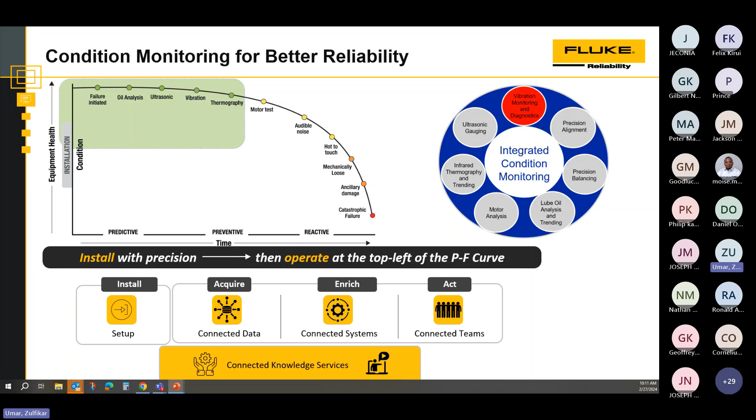Before we go into that, maybe just some ideas on exactly what we're talking about when we talk about vibration analysis and condition monitoring. Every equipment in your plant vibrates, and it is the aspect of this vibration that we want to look at. Sometimes vibration is good, but when changes start to happen and vibrations get more intense, that is when we should be looking out and have an idea of what we need to do. So the idea with vibration testing is to increase plant reliability and reduce maintenance costs. Those are the two key features we'd like to pull out from the slide.

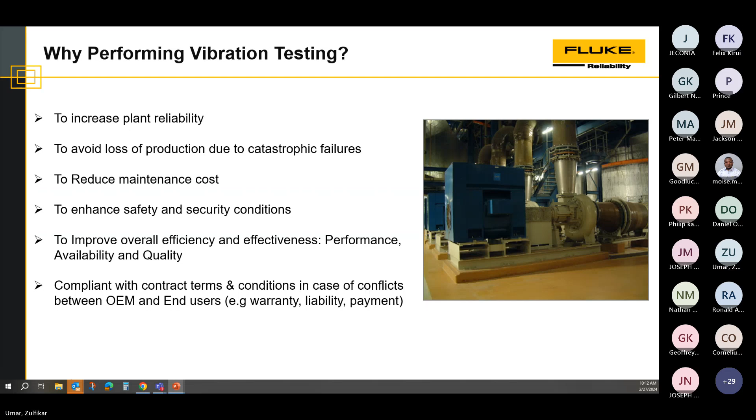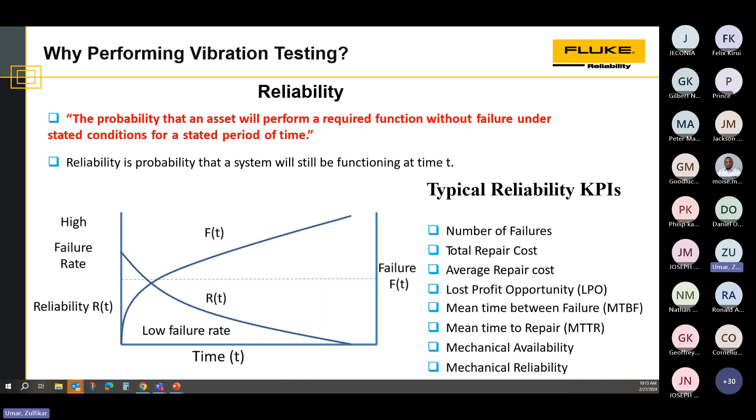So we spoke about reliability, and reliability in a nutshell is the probability that an asset will perform a required function without failure. This gives us the chance to keep equipment up and running, improve our productivity, and reduce our downtime. A typical reliability KPI, or key performance indicator, tries to determine how many failures we've had, what the total repair cost was, how long to failure, and how long the failure affected our productivity. These are the KPIs that we would want to manage, and the kind of KPIs you'd be able to work with in your CMMS system.

As discussed earlier, just to go to the basics, the first part of this presentation is really to solidify in your mind exactly what vibration is and why it's important.

In simple terms, vibration is a response to some form of excitation. Essentially, with a motor, you have a driving force, you have a speed. That speed causes a vibration on the equipment, and the condition of the equipment can be monitored and explained by the type of vibration that we are seeing.

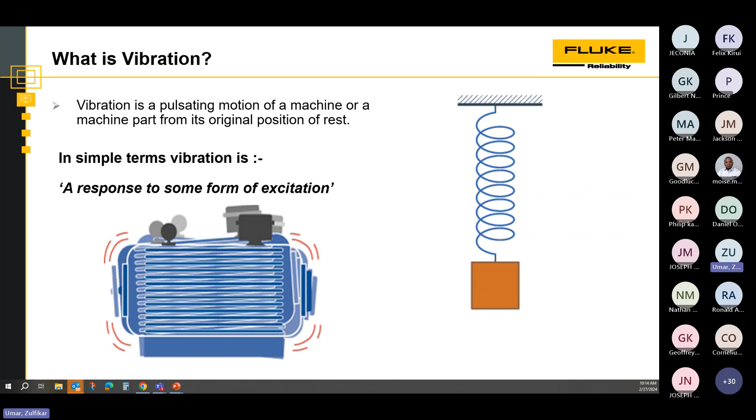So we measure vibration, or look at some characteristics of vibration: the amplitude, how high the vibrations are that we're seeing; the frequency, how often we see them; and the phase, how it relates to the other vibrations coming from the machine. Typically the phase relates to the driving force, and in most cases the driving force is the speed of the motor. So those are the three things we look at on a vibration spectrum: amplitude, how severe; frequency, how often it occurs; and how it relates to the driving force.

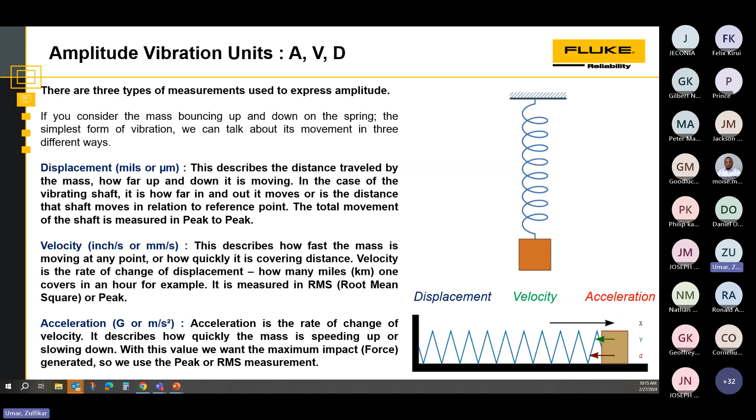When we measure vibration, we measure it in different ways. We have displacement, which describes the distance traveled by the mass, or the movement in mils or micrometers of the equipment; the velocity, the speed at which this displacement takes place; and the acceleration, which is the rate of change of this velocity. These are the three ways in which we measure the parameters for vibration, and we'll talk about this more as we go on.

If we look at what we can see, feel, or hear while looking at these vibrations, typically you would see displacement. If you're looking at a machine and can actually see the movement, that would be viewing displacement. Velocity is typically what you would feel in the sense of a vibration - you might not necessarily see the equipment moving, but you will feel that it's vibrating. And if you're looking at acceleration, this is something you typically would hear - you might not see it or feel it, but you will hear that there is change.

If you look at that in the frequency range, the lower frequency range is the physical movement - displacement. The low to mid frequency range is the velocity movement, or the feel. And when you start to hear things, you're looking at the high frequency range. When we talk about things like shock pulse, this is a specific technology we use for bearing detection. You will not see it, hear it, or feel it, but it is happening at very high frequencies that are out of the range of human perception.

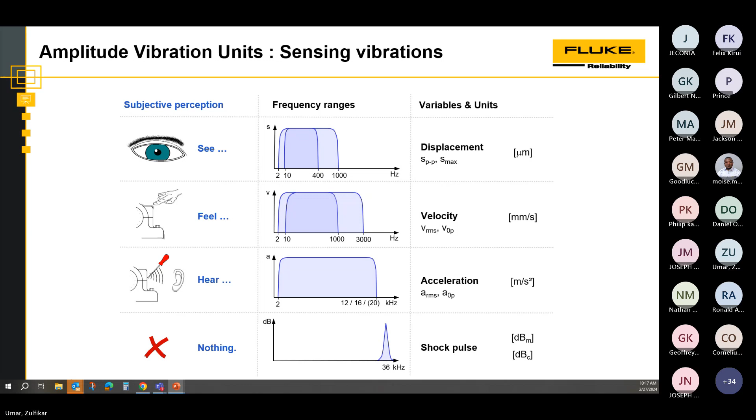So there's different levels in which we would like to look at the vibration. The overall measurement gives us an indication of what the overall vibration is for that machine, and we would just give it a figure. Let's say, for example, 10 millimeters per second. That doesn't tell us anything more than that the machine is vibrating at 10 millimeters per second.

If we now compare that against how it was vibrating prior, in previous history, and we see that the 10 millimeters is higher than, say, the 8 that was standard for the last week, then we now know that something is changing and that the vibrations are getting to a level where we need to start being concerned. So the overall measurements are usually trended over time, and that gives us an indication of machine health.

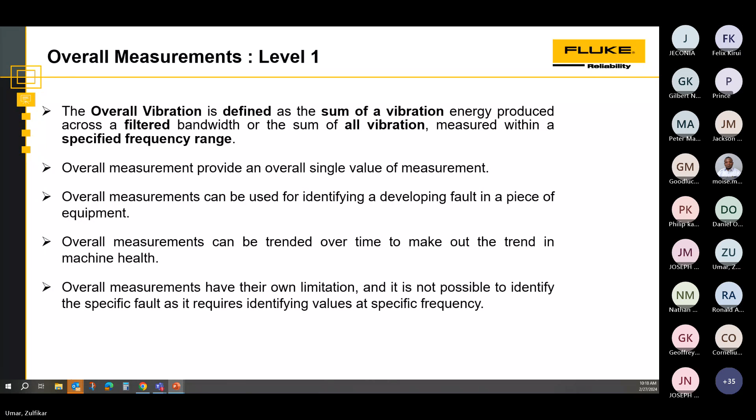Typically, you would have equipment that might touch or cross an alarm level and then settle for some time. That would be a first indication that something is happening, and that you need to start keeping a little bit more of an eye on this equipment.

Then as that particular problem progresses, you'll see that it will start to cross the alarm levels a lot more, and this is now when you need to start taking some kind of action.

If no action is taken, you'll find that it will reach a point where it has come very close to failure. You've now crossed the alarm levels, and the trend remains higher than it was before for a short period of time before it fails.

Once it fails, or once you've taken some action, you'll see that the trend will then settle to the levels it was at previously. So that's just some idea of how we measure vibration.

Vibration, as a standard, is normally measured as vibration root mean square, or RMS value. In some cases, we work with peak or peak-to-peak, or with an average. But across most of the standards we work with in industry today, velocity is measured in RMS, acceleration in peak or peak-to-peak, and enveloped acceleration in peak.

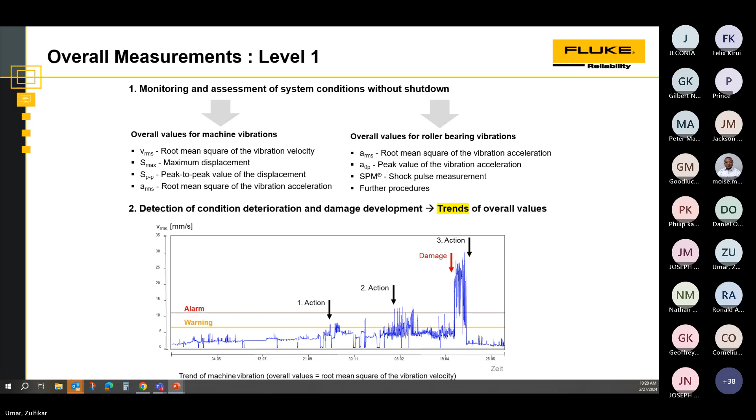So if we first looked at level 1, we're looking at just the overall vibrations. When we start looking at level 2, we want to know something more, so we want to look at spectrums now and start to determine what is causing the fault - where is the high vibration coming from.

In condition monitoring, your motor pump set would be considered your most basic or simplest machine set. That's purely because you have a shaft on the motor with a rotor and stator, 2 bearings, a fan, and then a coupling. Each of these components, at a specific speed, would give off a specific signature or frequency, and these frequencies would indicate where the fault is coming from.

Likewise, on the pump side, you have a shaft with an impeller. The impeller has, say, 6 or 7 blades, or 3 blades. The bearings on the shaft would be in 2 places, the drive end and the non-drive end. All of these would contribute to the vibrations that we're seeing.

And then, of course, you have the coupling, which would be the unit connecting the two. You would also find that the coupling itself has a number of bolts, and the number of bolts would also give off a frequency spectrum that would tell you when the coupling has an issue or not.

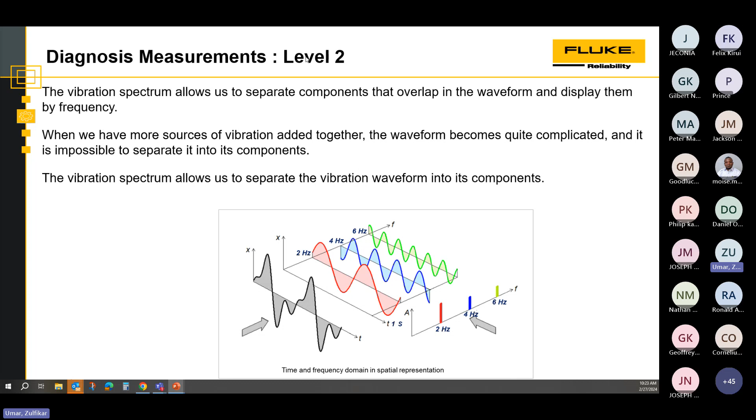It would then be a multiple of the running speed times the number of blades. And then you would see, maybe in green, the frequency coming from the bearing on that motor. So what we're trying to show here is that the time waveform, which is what you're seeing in gray, can be, through post-processing in the software, converted into an FFT - a fast Fourier transform - which allows us to look at specific frequencies with amplitudes, telling us exactly what problems we're seeing. This would be level 2 of the analysis, level 1 being the overall value, and level 2 now looking at specific frequency sets.

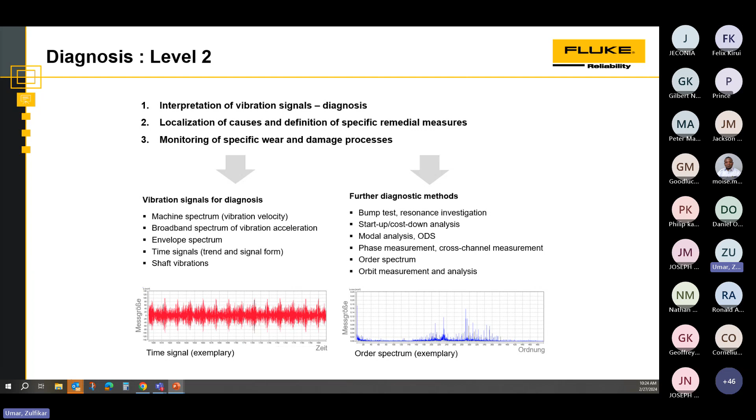This is the last slide I have in this section, just to give you an idea of how the levels of progression on the vibration strategy go. So overall values, overall monitoring, is level 1, which is your basic entry-level vibration data collection. Level 2 is where you start interpreting the vibration signals and looking at the frequencies.

In level 3, you start looking at how these are changing - what are the trends, how quickly, what is the speed of progression, how soon do you need to set up statistical analysis on this, do you have similar motors or pumps in the range that you can compare against. That kind of thing is where you start looking at the analysis forecast. These levels would be very similar to the ISO levels you'd get in training, concentrating on the different aspects of what you need to look at.

So that is just what vibration analysis is in a nutshell, a high-level look at it. I will have a second presentation now looking at how we collect the data, but I'd like to stop at this point and ask if there are any questions before we carry on.

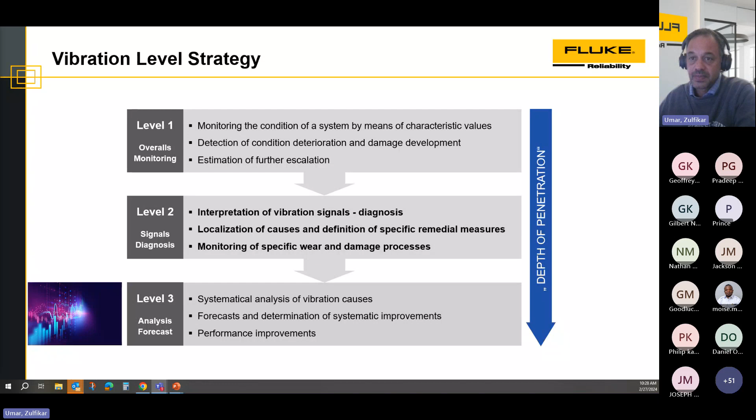Zulfikar, there's a question on the chat. Just check that out, give me a sec.

The question was asked: the Fluke 805 vibration meter, is this a good meter for these applications, or is the 3561 better? Just give me a sec, I have something on my presentation that's not working right. Let's take that off. There we go.

So the 805 vibration meter is what you would call a level 1 unit. It gives you an overall vibration in displacement, in velocity, and acceleration, and it also gives you an indication of what the bearing condition is.

These values are spec'd against an ISO standard, which I think is the 10816-2, the standard for vibration on land and on stationary equipment. So this is a good place to start. It gives you an overall value.

It requires that you do this repetitively, so if you're going to a specific machine, you collect the vibration data at the same measurement point each time under the same conditions. So if the equipment is a compressor, for instance, you need to know that the compressor is offloading at 80% when you take the vibration data, and then when you do that again next time, you need to know that it's offloading at 80% again.

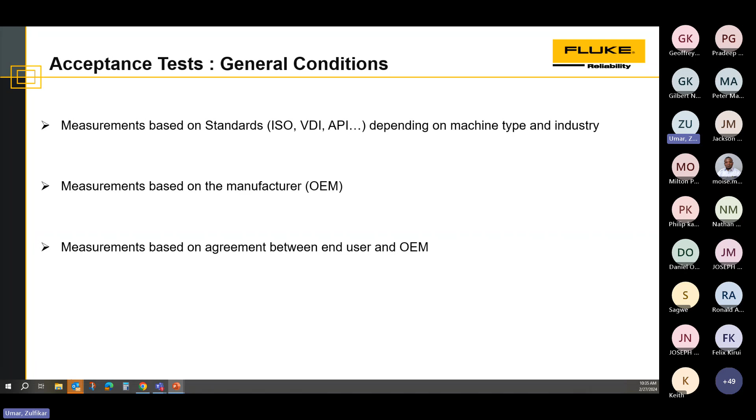Defining the acceptance tests according to the machine type is something done by a standard, for instance like the ISO 10816-2. That is the standard for most stationary equipment on land, meaning not mobile equipment like trucks or that kind of equipment.

There's a lot of discussion around the standards. They have been around for a long time, and they are quite well governed by ISO. When you do the Mobius or the ISO or the BINDT training, they speak quite a lot about this. A lot of the OEM equipment for condition monitoring sets their standards against the ISO standards, but bear in mind that this is also just a starting point.

If you have a lot of history on your equipment, you will find that sometimes equipment likes to perform either higher or lower than the ISO standard. That doesn't necessarily mean it's a bad performer - it just means that in that particular application and environment, that equipment works ideally at a slightly different level. So the ISO standards are usually a good place to start, but with your trending history you will start to change your acceptance levels for that equipment based on your history rather than on the ISO standard.

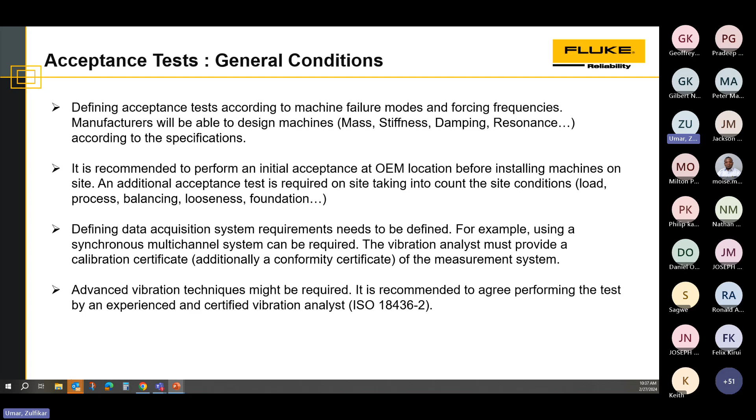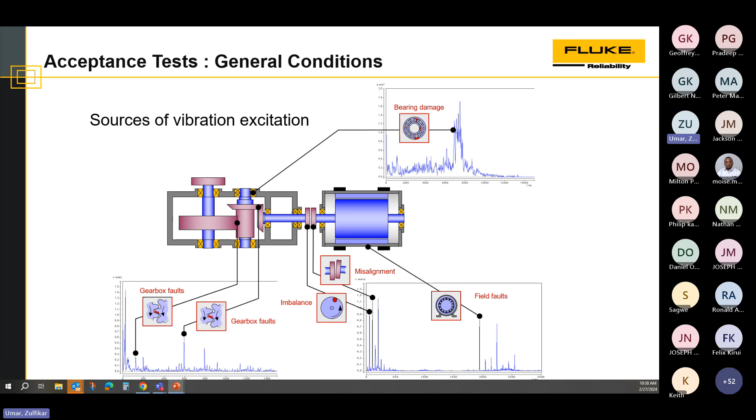On the left-hand side one, you can see where the gear mesh frequencies are and where they start to show up. This is just a representation of what we can pick up from the vibration readings taken from the machines. Once we have these vibrations, we need to look at the standard and see where this fits in, and how we use the standards to determine the severity of the problem.

If we look at, for instance, the ISO 10816-3 system, it breaks it up into two groups of machines: large machines and medium-sized machines. Depending on how the foundation is, the vibration levels change. A newly commissioned machine can work very nicely up to 3.5 millimeters per second RMS, and it's still acceptable up to 7.1 millimeters RMS. But once it moves into 7.2 up to 11 millimeters per second, you're now in a restricted zone, not good for long-term use. Anything above 11 millimeters per second is considered very high.

So you would look at this and say, well, that's for a flexible machine - what does that mean? It depends on how your machine is mounted: is it mounted very rigidly to the base, or does it have flexible vibration mounting or vibration pads that allow it to move? Typically on a fan system you would have a flexible mounting, but on most other equipment you would have a much more rigid setup.

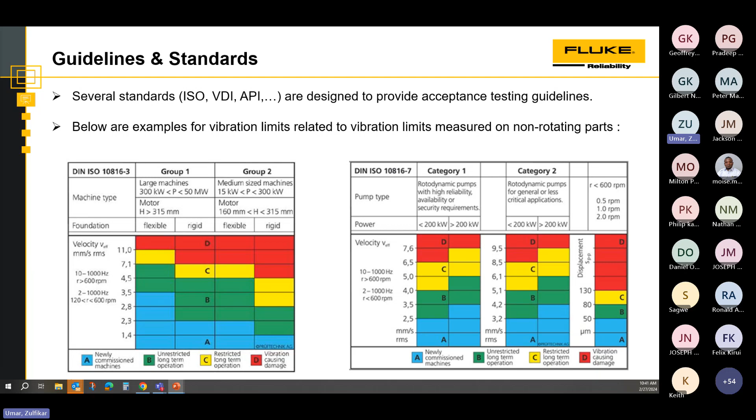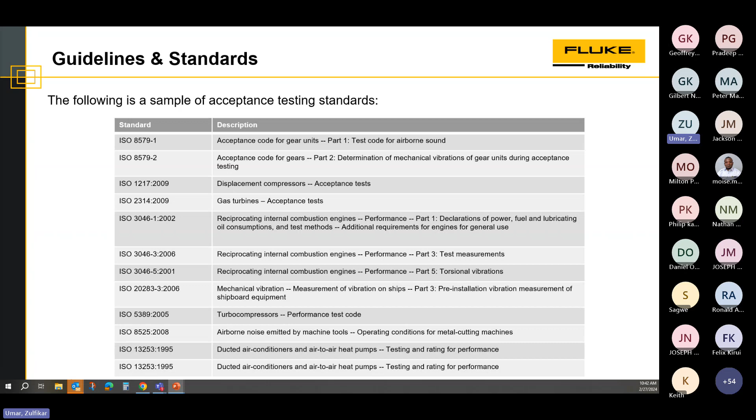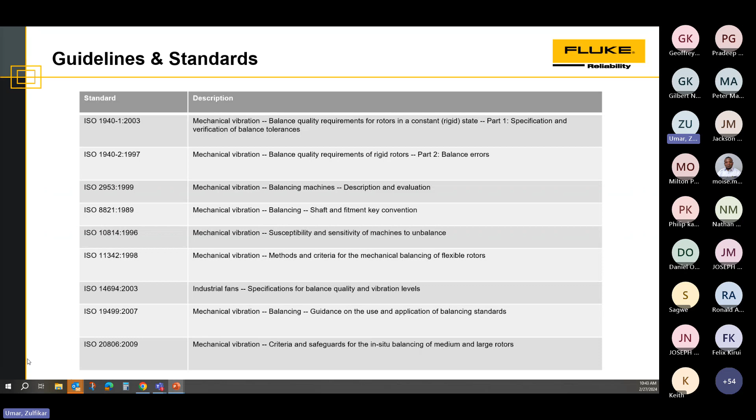So when we look at vibration levels, we've spoken about overall levels, the frequency sets we see in the spectrum, and the severity levels based on ISO standards. Now we need to look at where we start collecting the vibration data. The importance of collecting data at the same position each time is important so we have comparable data.

And also, why do we look at vibration data in specific directions? Vibration is very focused in direction, and sometimes you'll find the vibrations in the vertical plane, for instance, are not as high as in the horizontal or axial plane, and each of these will tell you different things about the faults you're looking for.

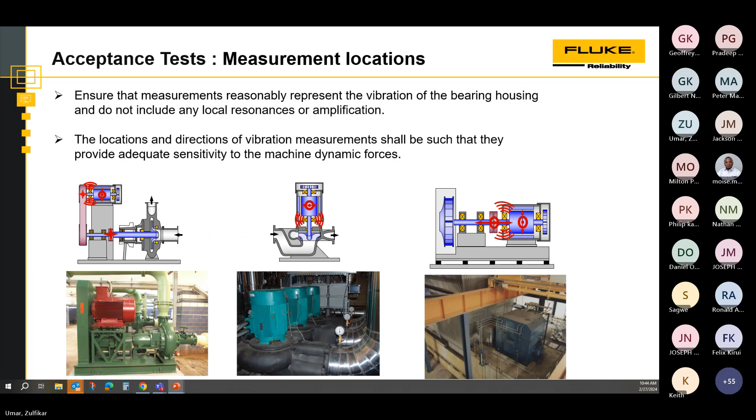If we look at a vertical pump set and how we'd collect the data: anything in line with the shaft is typically known as the axial plane, and anything 90 degrees to that is known as the radial plane. The radial plane is then split into vertical and horizontal - vertical facing the ground, and horizontal being 90 degrees to that.

So in collecting data on a vertical pump like this, you'd really only collect on the axial and radial planes, and you'd call the radial position by convention like a clock - the 3 o'clock, 6 o'clock, or 12 o'clock position. On a normal bearing housing, the horizontal plane is on the left-hand side, the vertical plane is from the top, and the axial plane is in the axis of the shaft.

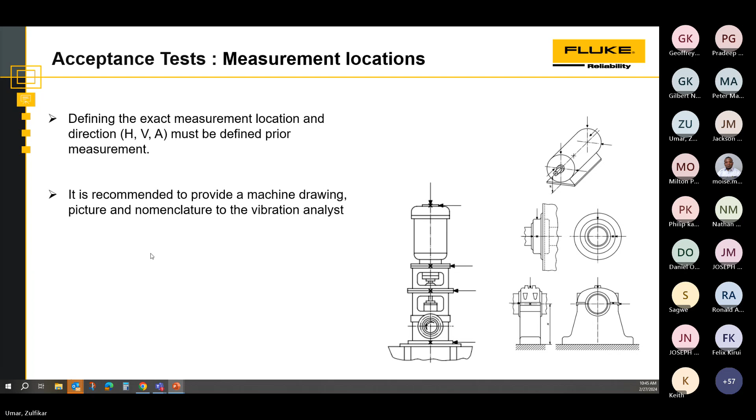So we can collect vibration data - we've spoken before about 3 ways: displacement, velocity, or acceleration. We use different sensors based on what we're trying to gauge. On white metal bearings or non-roller element bearings, we'd typically use a displacement probe because the shaft is sitting in fluid, and you don't have rolling elements contributing to the frequencies you'd like to see in the spectrum.

So typically what you'd do is set up a displacement probe to see the movement of the shaft in millimeters or micrometers, which gives you an idea of the kind of wear you're getting on that fluid bearing.

You can then use either an electrodynamic velocity sensor or a piezoelectric accelerometer. Nowadays the standard is to use accelerometers for both velocity and acceleration readings, and the software does the processing to convert the acceleration reading to velocity. The reason is accelerometers give you a much higher frequency range to measure, whereas velocity sensors have a much lower frequency range. They're still used in industry, but for a very specific range or need, and typically you'd only use accelerometers for the rest of the plant.

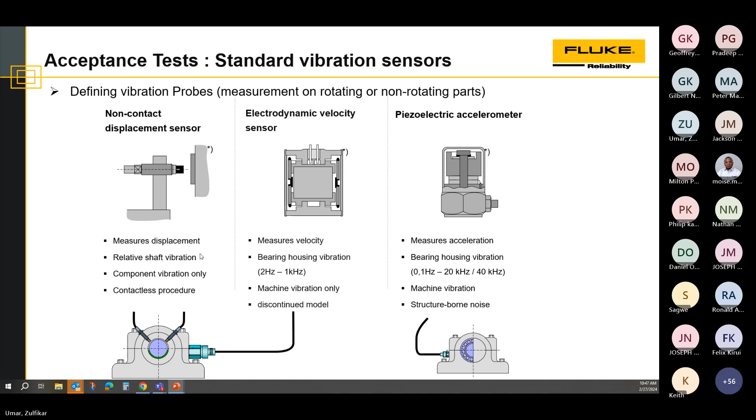So depending on the machine type and criticality, several measurement tasks can be defined. As we've spoken about before, you can look at overall measurements, which is your vibration, your DC gap from displacement. You can also look at the spectral analysis and band values from your frequencies. And then you have some more advanced settings where you start looking at run up and coast down, modal analysis and bump tests, and operational deflection modes or ODS, and then orbits for shafts. And then these are all different parameters that your vibration equipment can start looking at for more advanced analysis and detection.

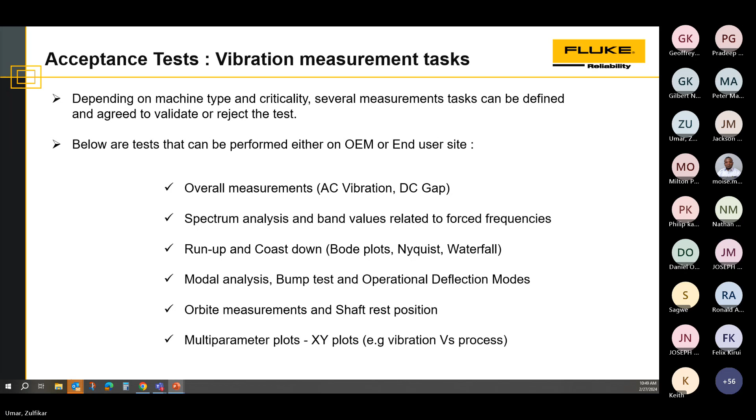So if we were to just look at one specific type of problem, and I think perhaps before I go further, I'm going to just maybe stop again for a quick question break, if there's any questions at this point before we go into unbalance.

There's a question on the chat, Umar. I see it now. So the question was, which value we can define as normal for the old machine when replacing this machine on the Fluke 805.

Okay, so it depends on which parameter you were measuring. If we look at an example of, let's say, a fan: if you're using the 805 and you're collecting vibration data on the bearing housings, the velocity readings, the overall values would give you an indication of mechanical issues. The acceleration readings would give you an indication of your lubrication problems. And then you would use the bearing condition measurement that would give you an indication of how the bearing is failing. So if you're taking the measurement and trending over time, if for instance the acceleration is changing from 12 to 15 to 24 Gs, that would give you an indication that there's lubrication breakdown. Once you've changed the lubricant or added the lubricant, you'd expect that the acceleration reading would go down back to below 12. Sometimes this does not happen straight away because the lubrication needs to work in. So you might find that the reading would, after lubrication, go up to say 26, 27. After a couple of hours, it would start to settle and you'd now be sitting at below 6, 7, or 8. So that kind of gives you an idea. You've got to really see what it is that you're doing and what are the values that you're measuring.

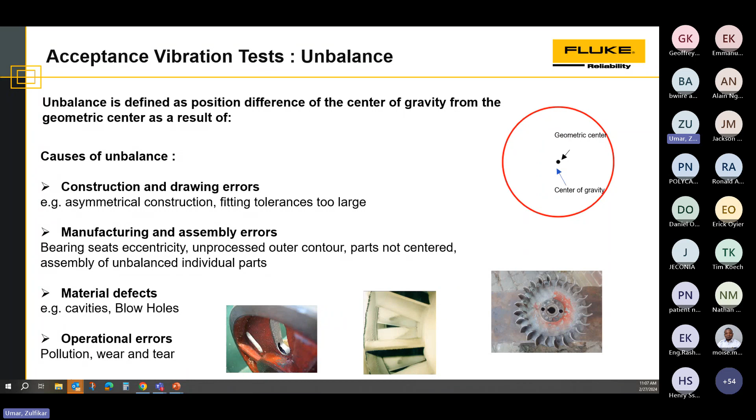This causes an imbalance, which then changes the vibration we are seeing and increases vibrations to unacceptable levels. For example, the reasons for more than 50% of machine damage is due to imbalance.

Typically it happens on fans and pumps, very differently on fans than on pumps. But in both cases, it's something that can sometimes be quite easily fixed using the right equipment.

I have a 3-minute video showing the balancing procedure very nicely. After speaking for almost an hour, I think I need a sip of water. If it's okay with the team, I would like to show the video—just a quick show of hands, please.

Please proceed, Umar. Thank you. I'll do that, give me a sec, I'll just change my screen.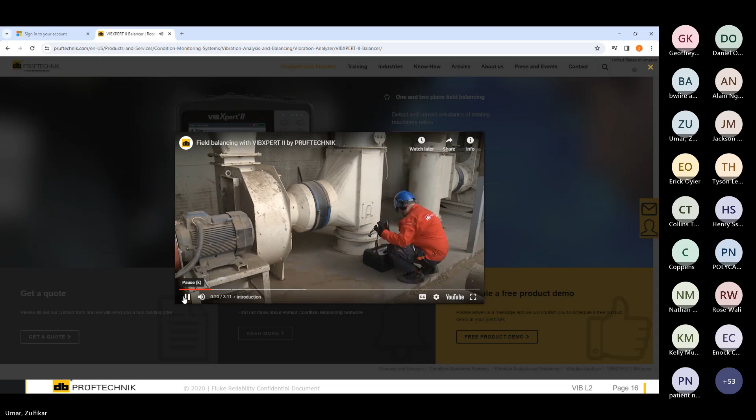What I'd like to try then is just talk you through what you're seeing. I still think this particular gentleman does a really good job of showing how balancing is done in 2 minutes.

So to walk you through it, he's looking at the fan and realizes there are higher vibrations. The first thing he does is take overall vibrations across all machine points to get a spectrum that will give him an idea of where the vibration is coming from. This matters because later I'll explain the difference between imbalance and resonance.

The first thing he does is take vibration readings in all planes on the motor and the fan—you can see here he's taken it in 3 directions. He then looks at the overall values and decides that yes, this is higher than the standard shown in ISO 10816, so he needs to look at where the problem is coming from.

He now looks at the spectrum, which shows a very high 1-times component, and that 1-times component indicates imbalance. There are other components in that spectrum, but they're small by comparison, so he's going to go ahead and do the balancing.

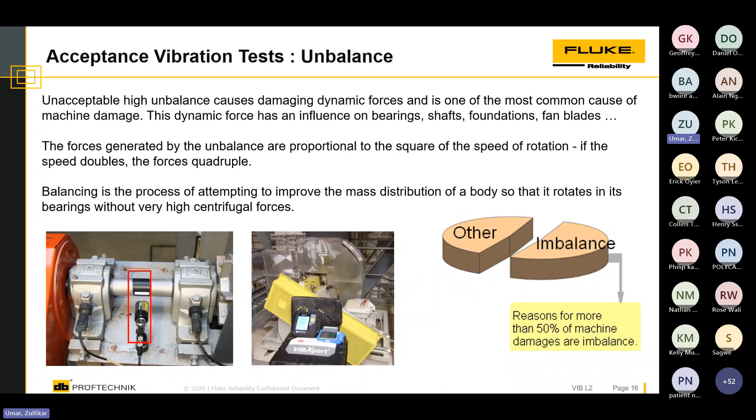The only other item I would want to look at is that you have a standard which would tell you the tolerances at which you can balance a unit. It's dependent on the type of equipment. The faster the equipment runs, the tighter the tolerance needs to be. So for a fan running at 1480 RPM, you could have a tolerance of, say, 5 millimeters per second, but for a unit running at 3000 RPM it would be much lower. This is due to the centrifugal force on the imbalance causing the machine to vibrate even more at higher speeds.

So this is just giving you an example of the type of class tolerances you would have and what is acceptable for different types of equipment. So grinding machine, very high tolerance of 0.4, whereas if you're looking at just the crank gear on a 4-cylinder diesel, 250 is quite acceptable.

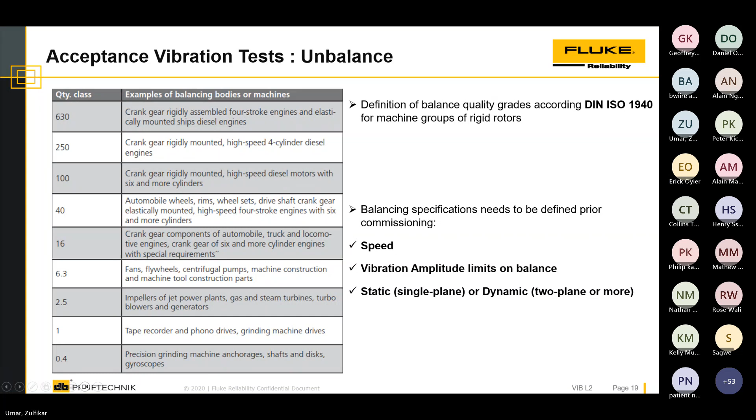So this is a screenshot of what you would expect to see on the VIBXPERT II balancer, and it shows you the position of the vibration as an angle, as well as a velocity reading. Then once you have changed the position or added the weight, it shows you how it has progressed. The idea is that you want to get all of these vibration levels as close to the center as possible.

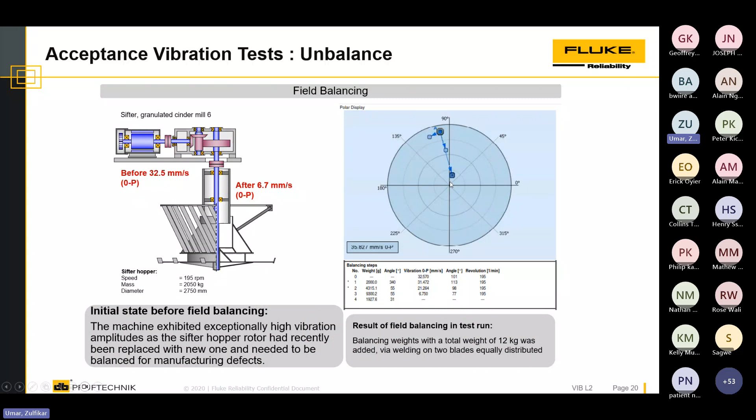Okay, so I mentioned that sometimes we have a setup. I think I've got some feedback from someone.

Thank you. So somebody was asking if the equipment can be used on wind turbines. Not balancing of wind turbines, no, not that I'm aware of. I would expect that would be a very specific type of equipment. I'm going to make a note of that. In my experience, I'm not sure that it has been done, but if I'm mistaken I will revert back to the group with the right information. But as far as I'm aware, no.

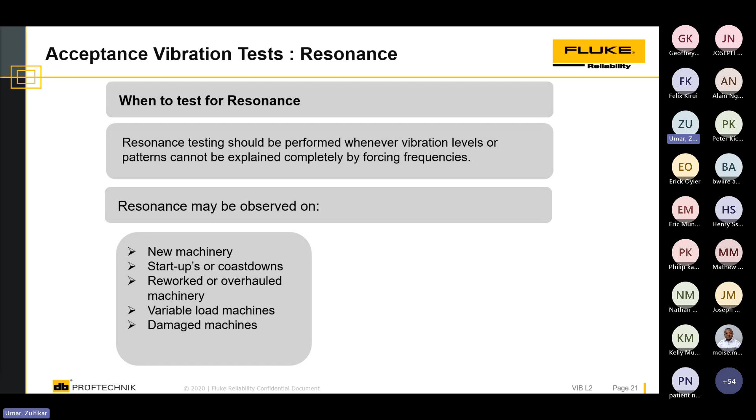And so there is a way to view this, I'm just trying to find my speaker notes. Typically using phase, you can actually see on your coast down or run up that there is a resonance issue, and then you can deal with that separately.

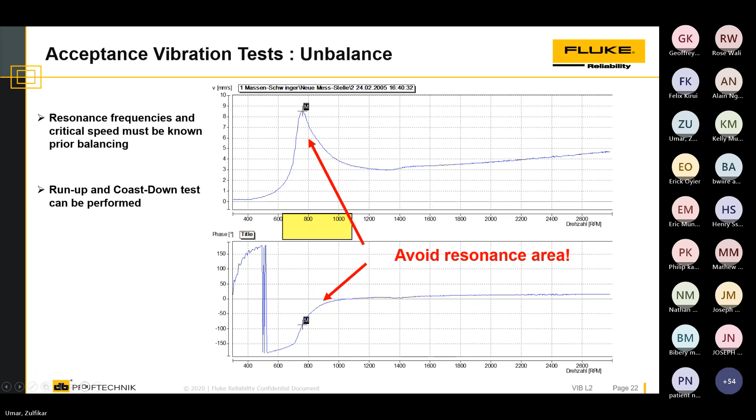I think that's all I have on balancing and resonance, and that brings an end to my condition monitoring speech on vibration analysis. I would like to transfer and change over to alignment, unless there's more questions now. I will just stop for questions.

Umar, there's one more question from Alain. Maybe you can tackle it before you proceed to the next presentation. Sure. In which direction of data collection is the imbalance detected?

It depends. If we're talking about direction of sensor, in most cases vertical velocity measurements give you the best, purely because the holding down bolts of the bearing housings make a much more sturdy frame, so any changes there would show up quite easily. But in a lot of cases you'll find guys take vibration data in the horizontal plane because that's where you get the most movement. So it depends on how the person doing the balancing wants to do it. If you want to see big changes, you will see it in the horizontal plane rather than the vertical plane. Sometimes by taking vibration readings in the vertical plane, you'll actually determine that it's not imbalance, it's actually loose mounting bolts. So, in both directions. This is why in the video, the guy starts off by taking vibration readings in all 3 directions, and then when he does his balancing, he decided on taking the vibration reading only in the horizontal plane. I hope that answers the question.

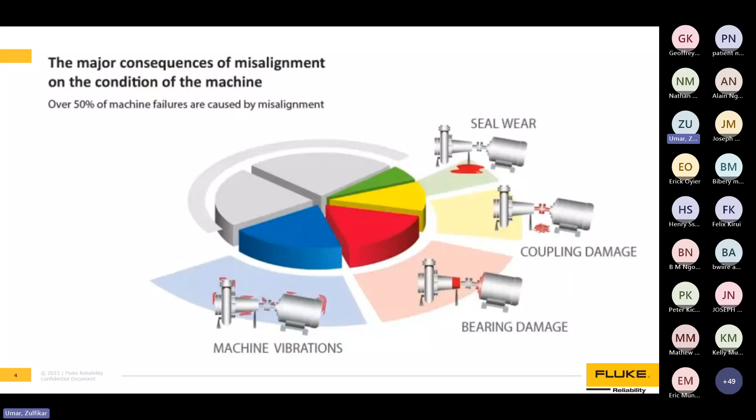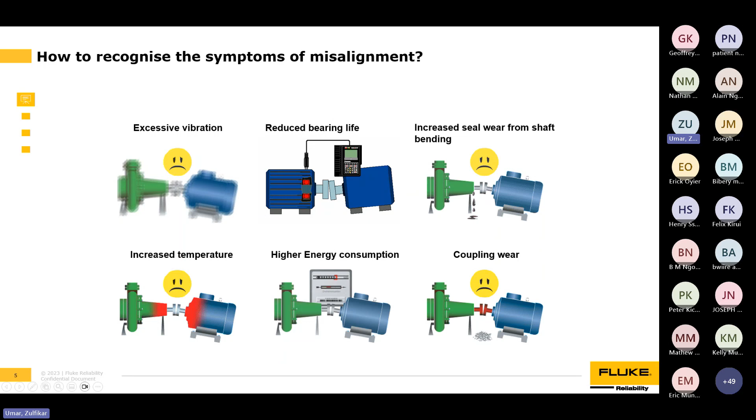I just need to find it. So we can see that all of these, although they might not be high on your visibility list — a leaking seal is a very good indication that your alignment is out. High temperatures on both the motor drive side and the pump drive side also point to misalignment. And something we don't normally look at, but which will also give an indication of misalignment, is energy consumption. I think that's what I wanted to bring home.

But before I do that, just to give you an idea of how alignment processes have changed over time — in the past, we would use a straight edge.

As a joke, they would call this guy the wizard because he would come out there and put his straight edge, take some time and align the coupling as best he could.

With time and technology changing, the specialist was born, using dial gauges - not the easiest way of doing an alignment. It takes a lot of time, but the level to which he's able to align the equipment is now improved by another 1/10. So where you're talking about 1/10 of a millimeter, you're now talking about 1/100th of a millimeter.

And now with laser equipment, the technician can come in and do the alignment to 1/1000th of a millimeter. The idea here is that it doesn't matter the level of expertise of the technician - the laser alignment equipment itself enables every technician to be as good as the next one.

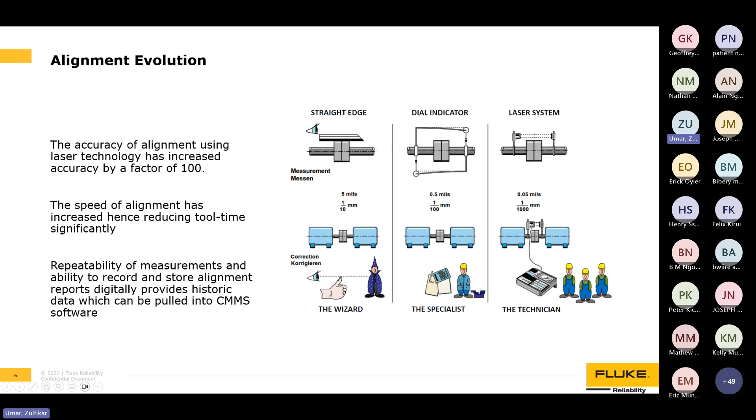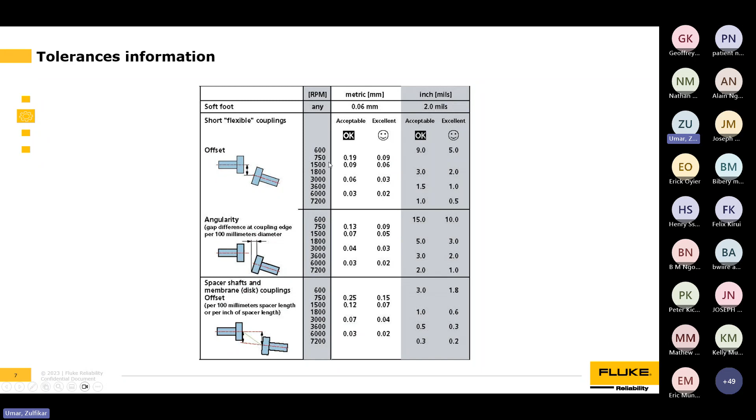How does this relate to the actual alignment spec? Most OEMs will show you what the coupling can be aligned to, or the type of misalignment that is acceptable. Depending on the type of coupling being used, you can have more or less misalignment. It's also dependent on speed - the slower the speed, the more misalignment is acceptable, and the higher the speed, the tighter the tolerances need to be.

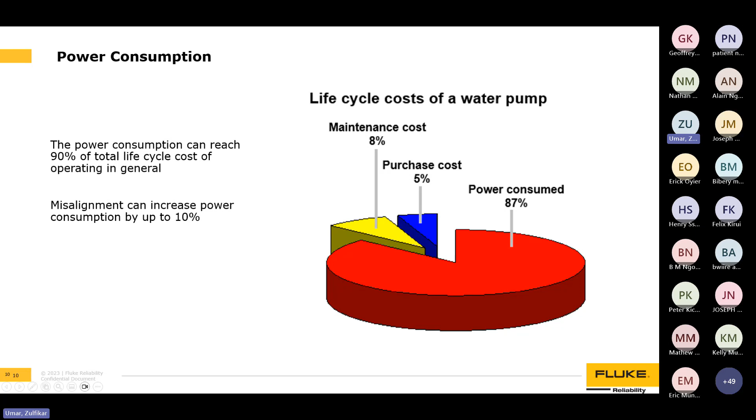I think this one for me is quite important, it's something we don't look at very often. The power consumption of equipment can be reduced by up to 10% over its lifespan. There is a calculation that can be done based on the rating of the equipment, the size, the amount of misalignment you have, and the cost of the power you're operating on.

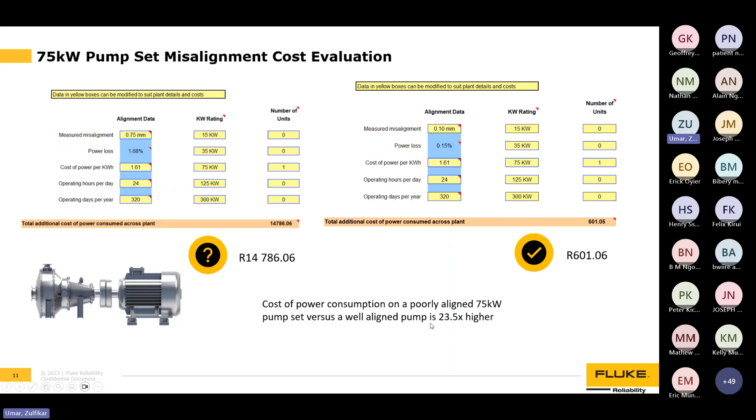This was done for a customer in South Africa in Rand value. You can see here that from a misaligned unit at 0.75 millimeters misalignment, the cost of electricity for that particular unit over a period of time was 14,786 Rand. Once the alignment had been done to spec, the cost on that same power consumption was 601 Rand. So that is almost a 23.5 times higher cost of electricity or power consumption on the unit because of misalignment.

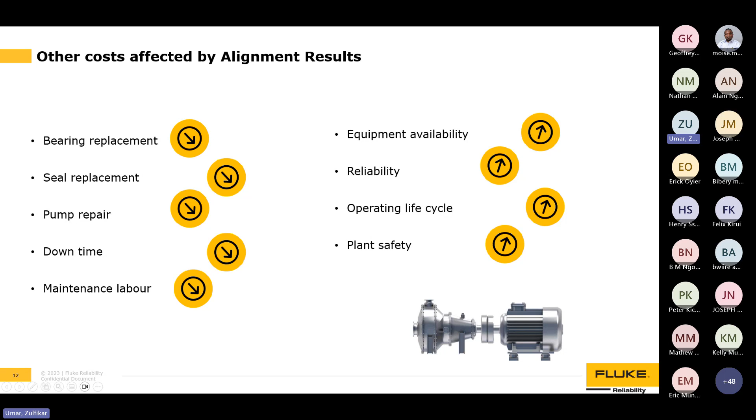So just to cover as a summary, the bearing replacement, seal replacement, pump repair, downtime and maintenance are all reducing, whilst your availability, reliability, operating life cycle and plant safety are all going up. That was really all I wanted to show on that.

I do have a calculation also on CO2 emissions, if that is one of the KPIs important to you and your business. We can do the calculations to show you the CO2 emissions reduced by every percentage of alignment that you do. I think it's quite an important aspect in this day and age - both power and CO2 emissions seem to be the type of KPIs most organizations are looking at.

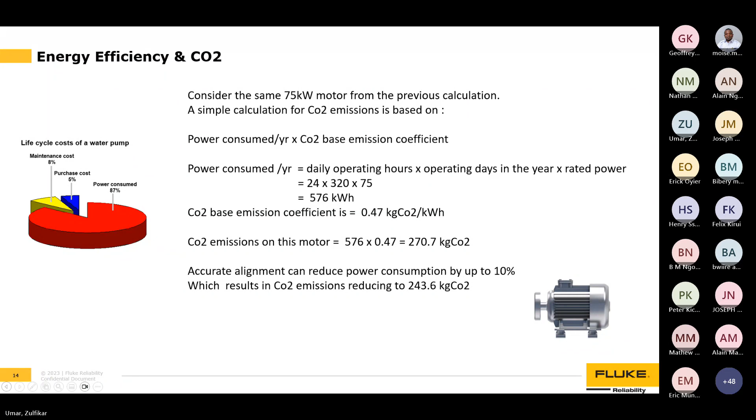If you would like to see more of this, I can share with you the calculations for that. That was all I wanted to show on this presentation.

I think we still have a few minutes. I did say I have a very long presentation on alignment, but I think I would rather jump through some of these slides to give you an indication of what the equipment can do.

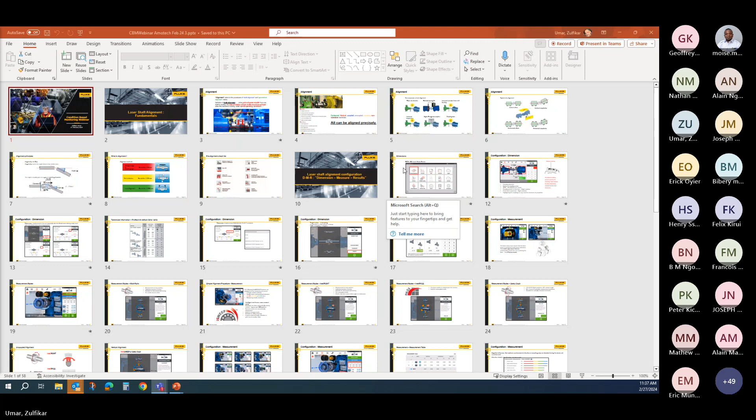There's a hand up. Let's see who that is. Okay, I think Daniel, we spoke with you with regards to your question. Let's go to... Okay.

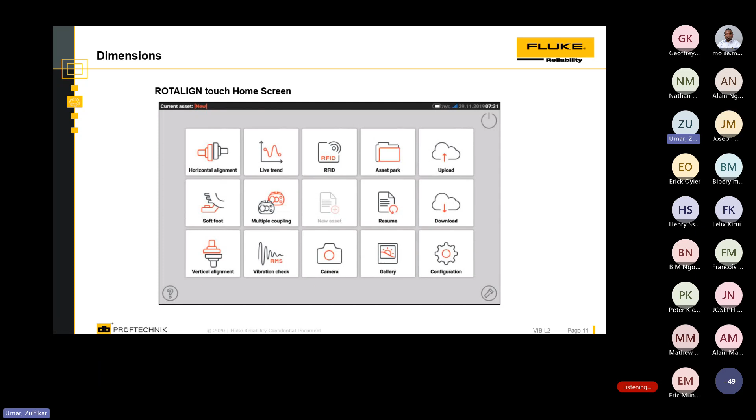So maybe what I'd like to touch on a little bit is the kind of functionality - I need to get rid of that - our ROTALIGN touch has. That is the PRUFTECHNIK equipment, top of the range on alignment.

You're able to do a number of different functionality with it. There's horizontal alignment, soft foot check, vertical alignments. You can do multiple coupling, which means train alignments - that is, for example, where you have a motor to a gearbox and a gearbox to some kind of compressor or other driven equipment.

You can do a vibration check. You can do live trend - live trend is a nice feature. You fit the sensors onto the equipment whilst it's running, and you let the unit take some data, and this allows you to see how the machine is reacting over a period of time and how the shaft centers move.

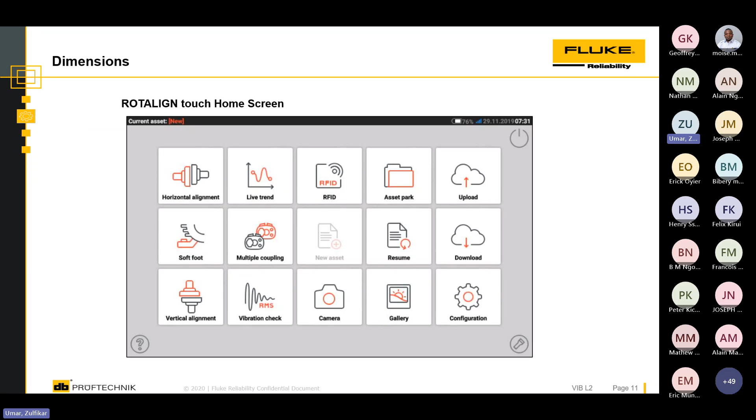You have RFID capacity. If you've got an RFID tag, the equipment can just be scanned and then it takes you to the same machine where all of its history is saved. And then you also have a camera if you want to take pictures of the equipment before and after the alignment.

So these are some of the screens that you would see when you're doing an alignment with the ROTALIGN. First thing to note is that on the sensors, there's a distance marking, which allows you to take the measurements quickly.

You have these images. Depending on the type of equipment, you can pull down and it will actually give you a pump or a fan or a gearbox as an image. You can rotate the image so that it doesn't matter on which side of the machine you're standing on.

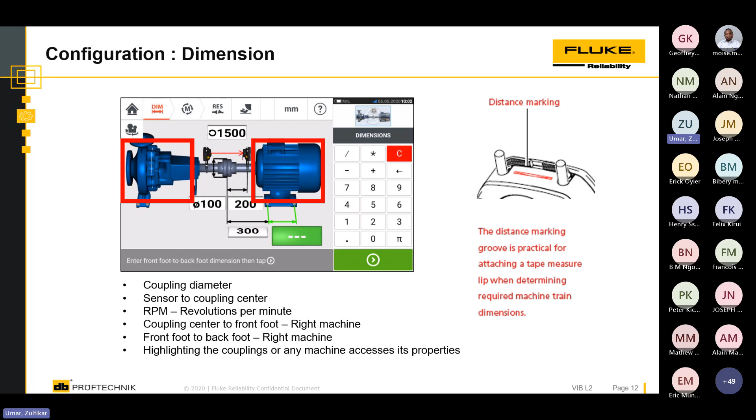That just allows you to make it easier for the user to see where he's standing. You have a different set of options - you can set the machine to determine what type of coupling that you have. So as you change the coupling, it will give you the different tolerances that you need.

You can also have user-defined tolerances, which means that if you, for instance, know that you have the OEM spec for that specific type of coupling or that kind of machine, you can then set the tolerances and save it so that you will always have it for the next time that you do the machine.

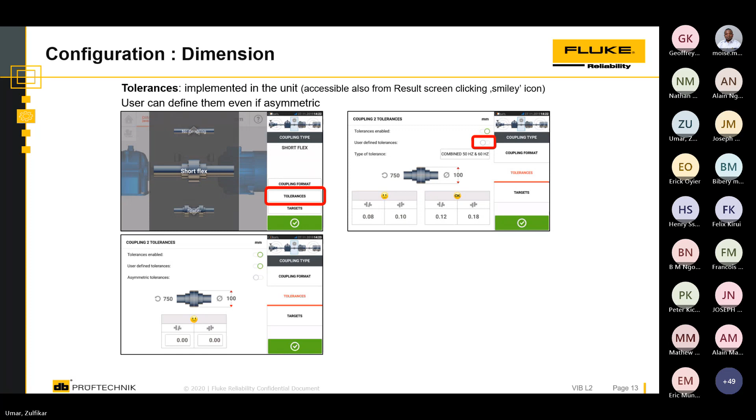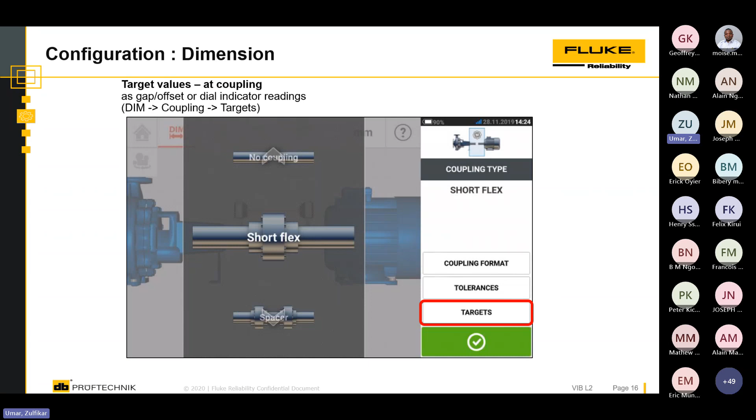So there's a number of functionality. We come back to the same screens. I just want to see if I can get to the screen. There we go. So now we have a picture of how the sensors are set up.

There's also a lot of different settings on the ROTALIGN touch, which allows you to do the alignment very quickly. You no longer have to just set your sensors in the 3 o'clock, 9 o'clock, 12 o'clock positions. You can actually now rotate the shaft in any number of degrees, and the system will allow you to pick up your alignment from that.

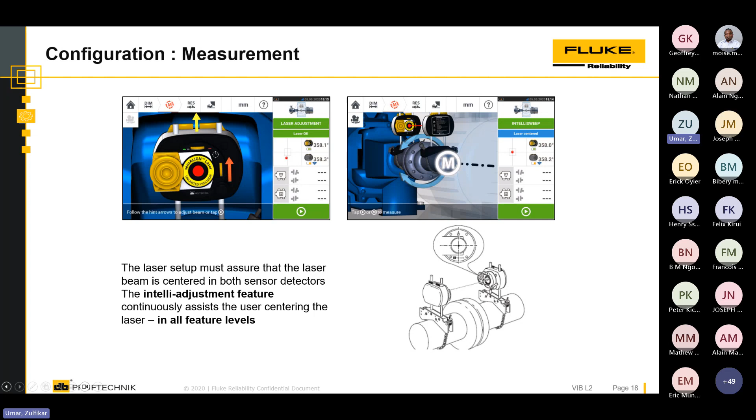I just want to see if I can show you that. So this gives you an indication - as you rotate your shaft, the sensors are taking multiple readings as they go along. Once the colors have changed from green to blue, it will give you the readings of what you're seeing.

It tells you the quality of the measurement that you have taken, how many readings it's taken, and what number of degrees that you've gone through the rotation. And this is called the IntelliSweep function.

So you can set it to take readings at your standard 3, 9, and 12, or you can go to IntelliSweep - it takes readings as you rotate it. All along the way, you've got these...

...directions that are coming up to show you what is the next thing that you need to do. So even if you haven't done an alignment before, the unit will walk you through step by step as you need to do it. So you've got either the multi-point, IntelliPass, or IntelliPoint settings that you can work with.

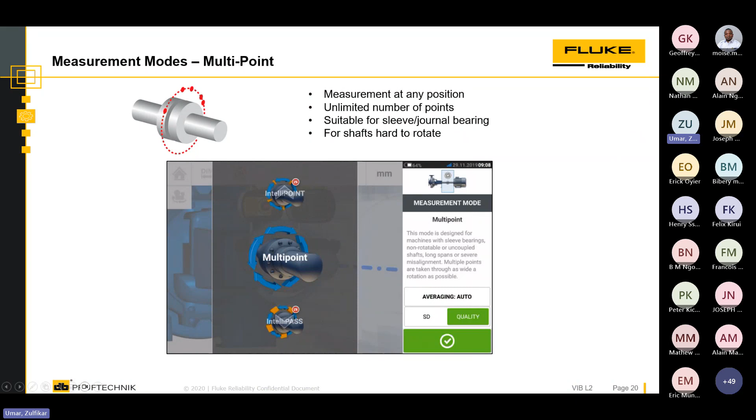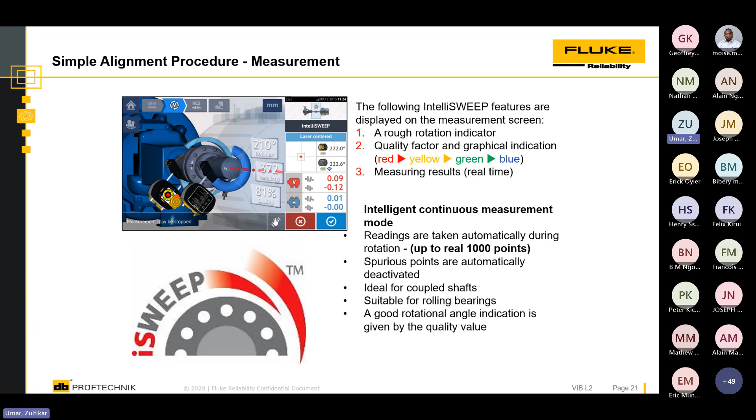And the IntelliSweep also allows you to work out what is the quality of the measurement that you're taking. If you're turning the shaft too roughly, it will tell you to stop the measurement because you've got too much vibration. And so it can help you to train your staff in taking the measurements in the correct manner.

This is again just showing you all the different measurement types. The most important parameter that I would like to point out about the PRUFTECHNIK range is the fact that you have only one laser and one sensor. Most of the other competitor units in the market have a laser and a sensor, a detector on both sides. The single laser sensor setup enables you to do the preset and the setup and the alignment much faster.

Assume that you have a machine that is very badly misaligned and you have the sensors on both sides. Then you will find it harder to bring those sensors to an agreed point than you would if you were only sending the sensor laser from one side. And I'll try and show that to you in a little while.

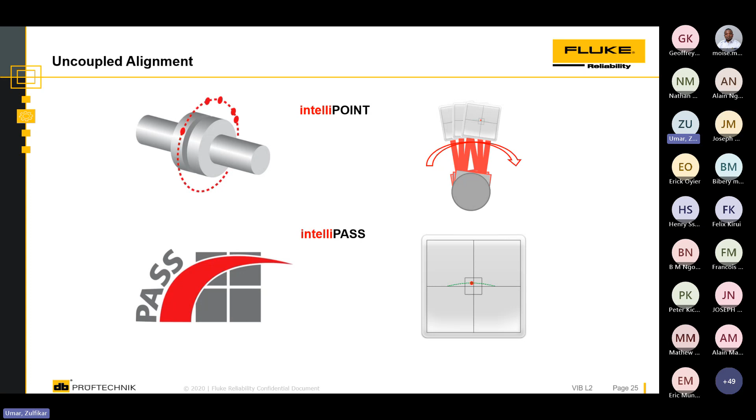So this is just some visions or pictures or images of how the IntelliSweep works.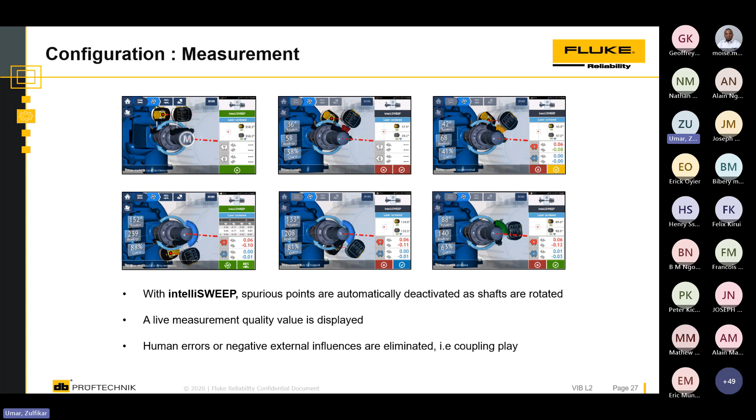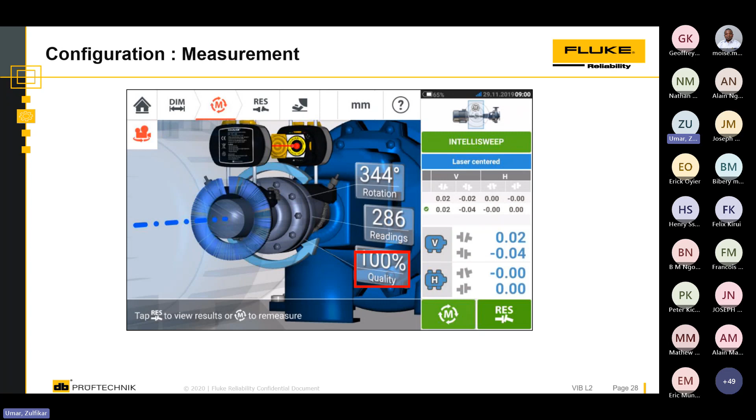I think I'm running out of time a bit, and I don't have time to go through all of this in detail. But if you have a specific need to have a discussion or another presentation specifically on the Rotalign Touch, we can do that.

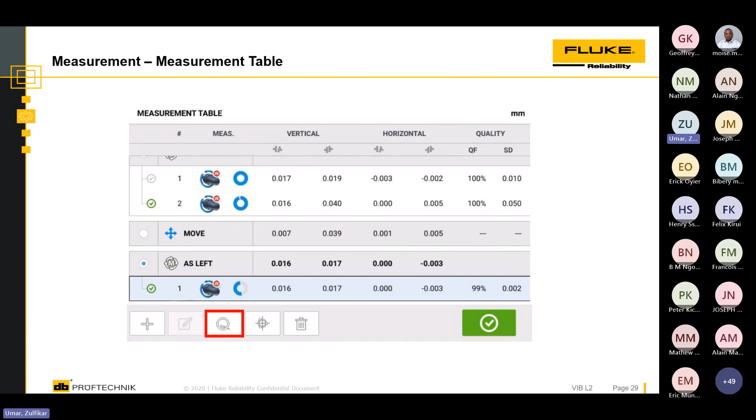I think that the condition monitoring, the vibration side of this discussion, went on longer than we were expecting. But these are some of the parameters you can get out of the alignment. When we speak about the IntelliSweep, it gives you a good indication of how the rotation was done, in what direction, and the speed of rotation, and all of this gives you feedback as to how to do the alignment better the next time.

What's also nice about this is that you can measure your misalignment and then also add your dial gauge readings as well. So it's taking from the older technology and allowing you to present that in your report with the newer technology.

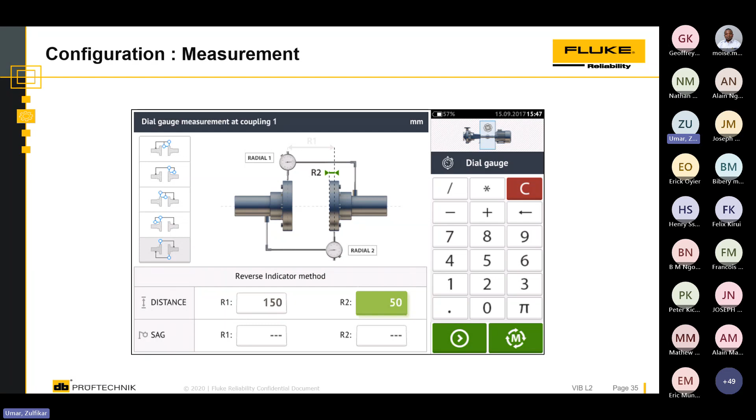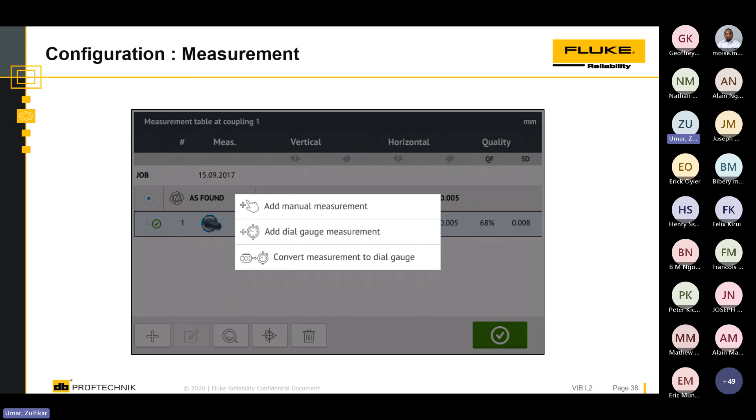I think I'd want to stop there and maybe ask if there's any questions at this stage. There was a request to show some of the equipment, so I think that's what I'd like to do now. But whilst I'm changing screens, if there's any questions, please feel free to go ahead.

There's no questions so far. We have a question from patient. You can go ahead and ask your question, please. Sure. Patient, are you there?

I have a short comment there from Henry asking, I wish you could touch on thermography.

Thermography. Although I have some experience in thermography, it does not fall into the range of Fluke reliability equipment. It does fall into the range of Fluke industrial equipment. I think that maybe we could do a separate session on that, or add that to the next plan.

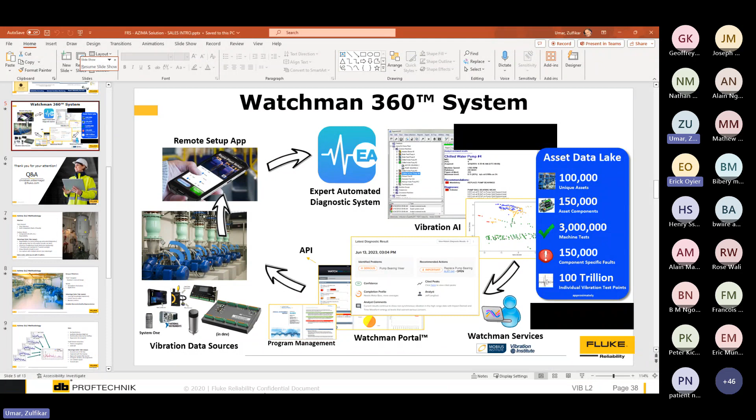Just let me know when you can see my screen. Yeah, we can see your screen, Umar. Okay, great. I keep getting this at the bottom, which needs to go. There we go, cool. So the Azima range of products has a wireless sensor called the Watchman 360. This is what we see here at the bottom of the screen. They also have the online equipment and the handheld equipment as well.

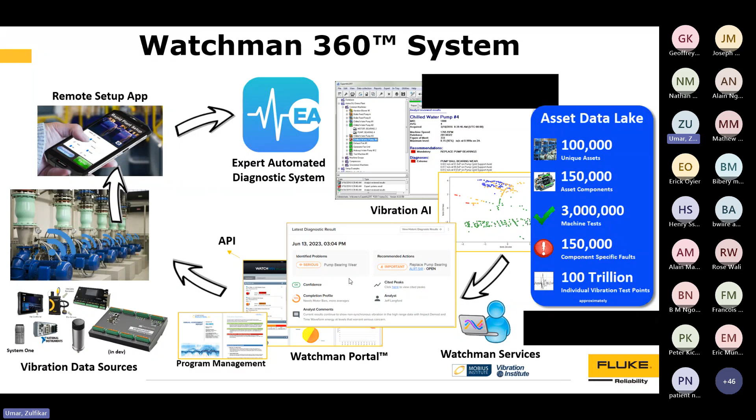But what I want to talk about quickly is the Watchman 360. The Watchman 360 is an EX rated wireless sensor. It's triaxial, fitted one on each bearing position. It then forms a mesh network. It has a gateway, and sends the data through to the cloud via your app. You are able to see or commission the unit, and then the data on the cloud is automatically analyzed, and a report is sent through on the condition of the equipment.

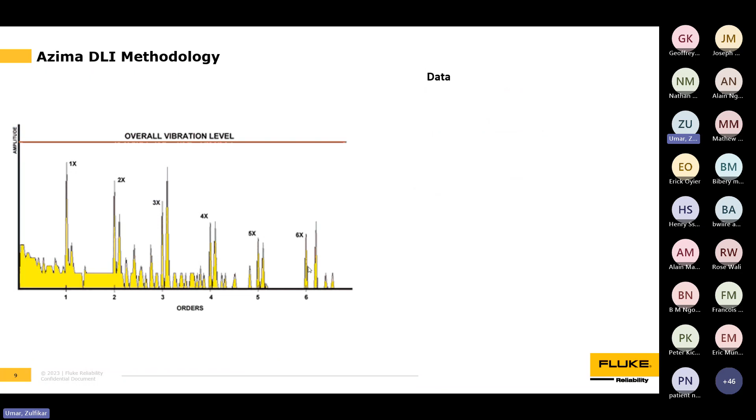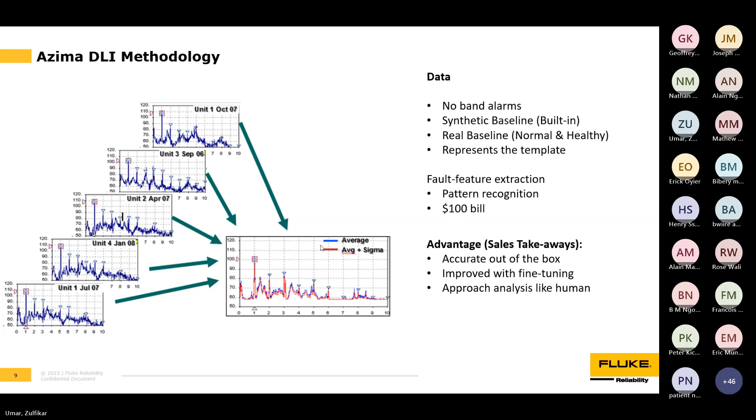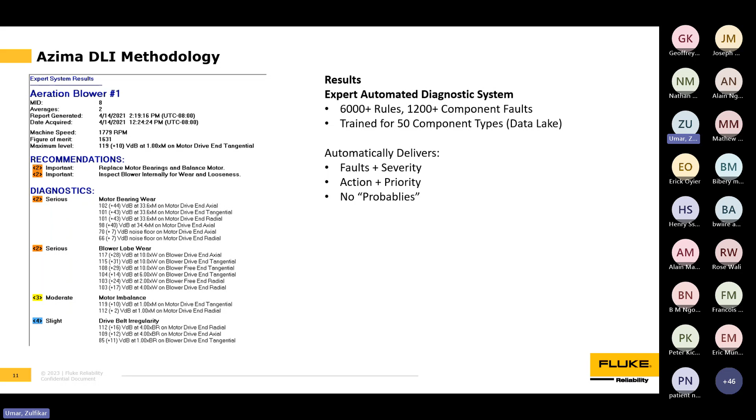They have over 6,000 rules, 1,200 component faults that they've already set up in the system. And after a few weeks of training, the system works very well with very little input from anyone other than the sensors. So I would like to ask again if there's anyone interested in the wireless systems. We've got two at the moment, the 3563, which is the Fluke one, and then there's also the Watchman 360, which is the Azima one. We can work between the two, whichever makes the most sense for the situation that you have on site.

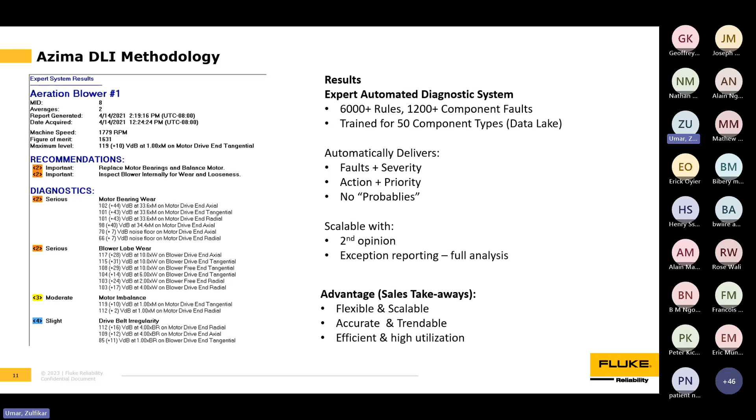Okay. And that is 2 minutes to go to the top of the hour. Any last questions, gentlemen? Umar, there was a question that we missed out on earlier as we started the webinar, from Polycarp Nyakundi. I believe he's still with us.

Yes, so I got this question from the Q&A tab, so I'll just read it out. How can we differentiate normal condition monitoring vibrations from other vibrations, such as earthquakes and earth movers? Oh, okay, that's interesting. So we are talking about condition monitoring vibration basis versus vibrations coming from the ground or from equipment that is running on the side or nearby.

They have a very different spectrum. Typically, you would not look at the overall vibrations, but at the specific frequencies we are seeing. A vibration from the earth, from earth moving equipment, or from trucks going by typically would not be at the levels we'd expect to see for vibrations on a motor, a pump, or a fan.